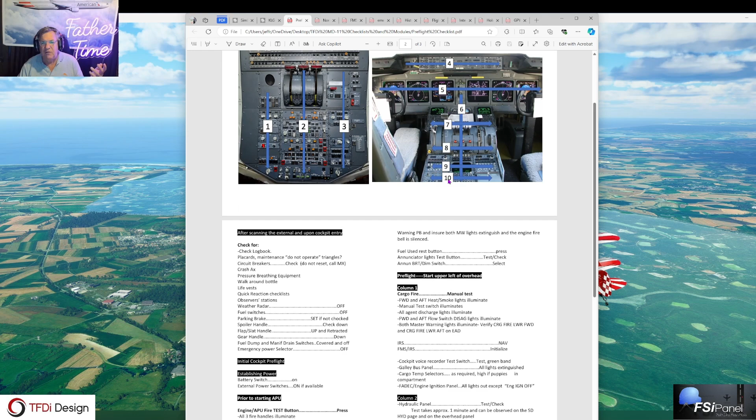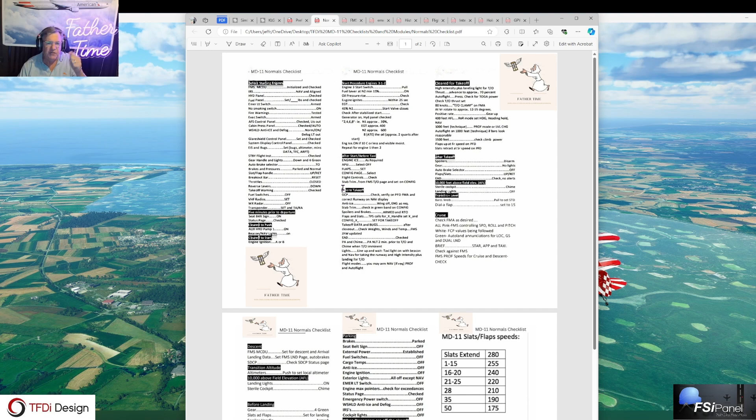I flew this back in 1992 to 97 with American Airlines as a co-pilot. And then this is a checklist normal. They're all printable and foldable, just like the old-fashioned. You could print this on cardboard stock if you want, or just regular stock, staple them back to back, fold them, and you've got yourself a real live checklist.

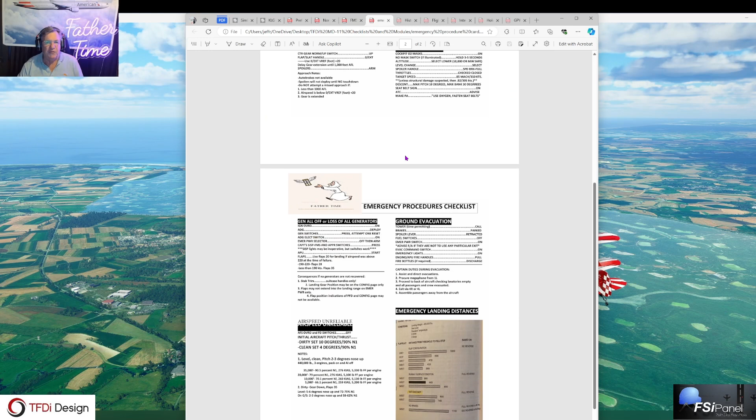Anything you see me do with the FMS is in here. I made up an FMS checklist, some real good stuff in there. Emergency procedures checklist, if you want to play around chopping engines and doing things, you can. This will get you up to the expanded checklist, which we don't have yet, but those are coming by the end of the year. But right now you can use this.

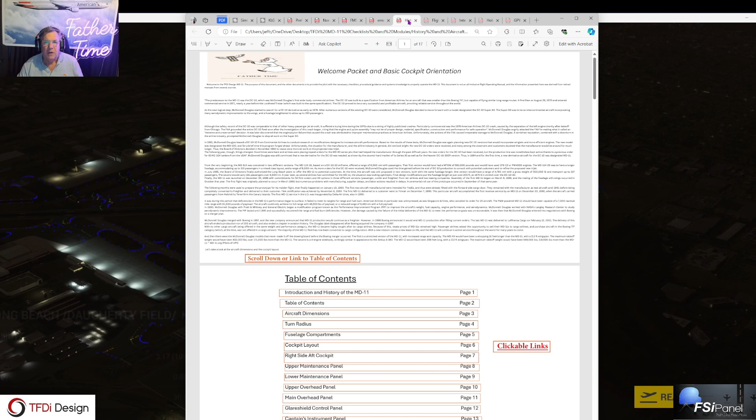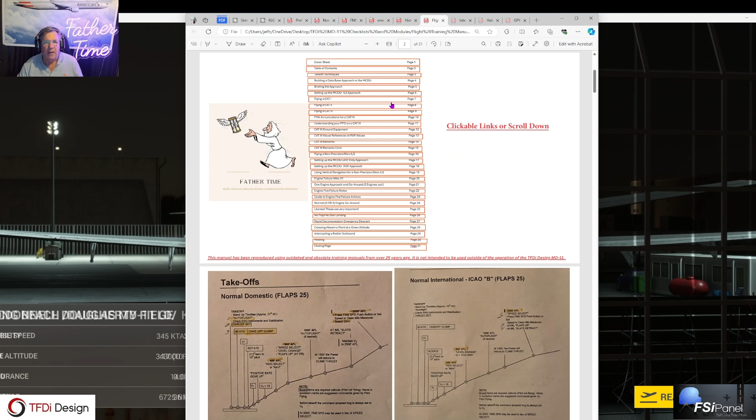Here's the history of the airplane. Click anywhere in the table of contents. You can see dimensions, do anything you want. Always go back to the table of contents right there. This is the flight training manual. So don't tell me you don't have anything to work with. One engine approach and go around right here. All sorts of information there.

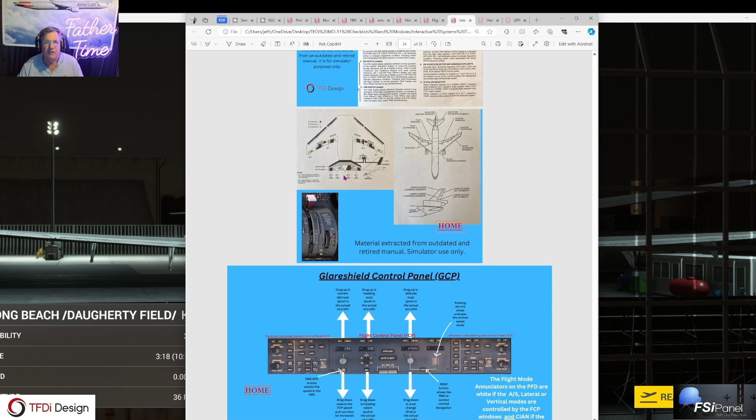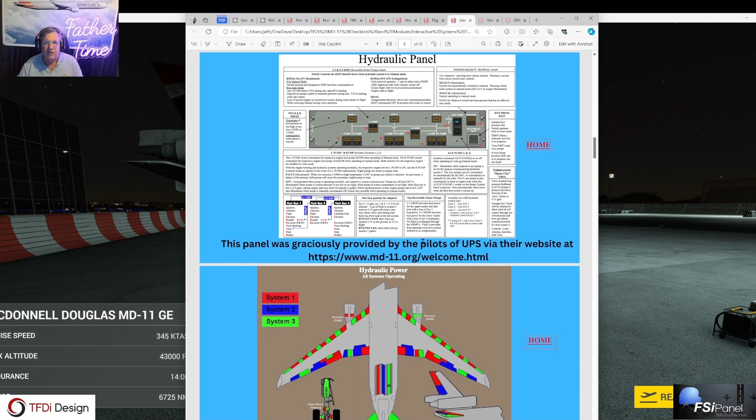Interactive systems guide, I made this up. I made up a lot of these panels myself, but some of them are also from, let's go, engine hydraulic panel there. Hydraulic panel from the UPS pilots via their website right here. It's an inactive site, but it's still accurate in terms of it's now it's there. That's interactive systems panel, real cool.

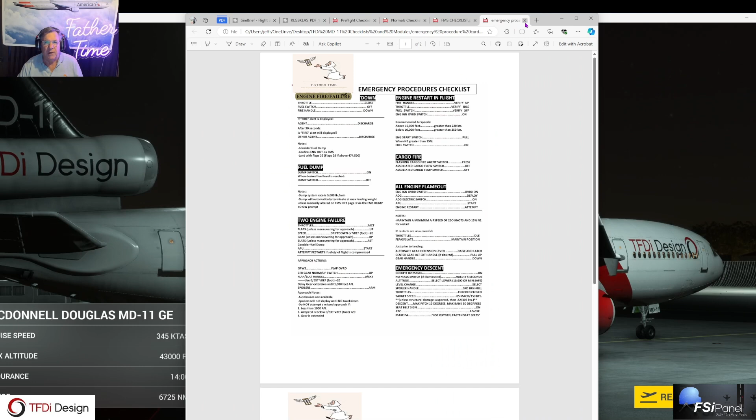Here's some holding information on the MD-11, what everything means, and lastly the GPWS test mode, what they meant. Fabio Almeida, one of the developers, made that up. But we're not going to need that one. We're not going to need holding. We're not going to need the systems. We're not going to need flight training or history. And I hope we don't need emergency. I'll leave the FMS checklist and the normals.

We'll start with the pre-flight. Our flight today, here it is, Long Beach. We're going to take a look at the facility to Las Vegas. And we got the PDF all set to go too. What could go wrong? Here it is, beautiful TFDi paint job. They asked me to fly this on part of the test program today. They saw a little bit of pink around the APU, and this thing just keeps getting better and better, guys. Honestly does. Beautiful. Anyway, let's go.

Big fan. I realized I haven't done, I'm going to make this daylight here. I thought I did, but I guess I didn't. What I realized is I think I went to live weather in there.

I haven't done a delivery flight yet. I used to do a lot of it when we were in the beta testing mode. Let me show you around here. It's really cool, very, very cool indeed. Let me go out here.

Freaky D, who's also one of our quality assurance guys and a Boeing engineer, has created the McDonnell Douglas delivery ramp from vintage 1994. Remember, Boeing bought McDonnell Douglas, so even though it's the MD-11, he's a Boeing guy and it's near and dear to his heart, so he created this. He's got like 140 scenery packs. It's his hobby, does them all for free over on flightsim.to.

Here it is, the McDonnell Douglas delivery facility. I just realized I hadn't done one of these since the developers were doing the development of the aircraft. Look at that, McDonnell Douglas fly DC jets. Freaky tells me this is the paint shop, you can tell by the ventilation system. Here's some unpainted MD-11, unpainted MD-82.

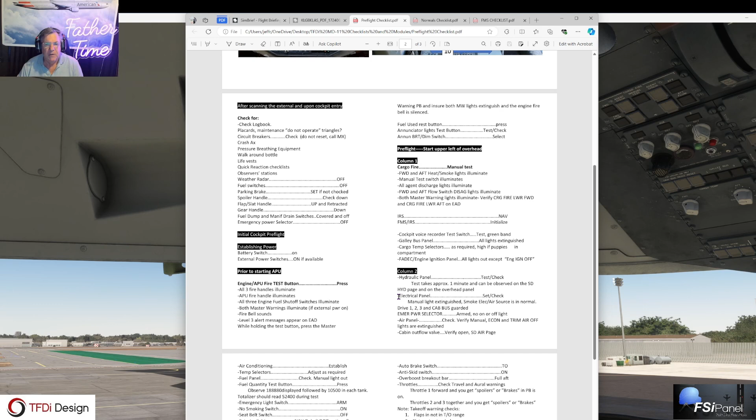Again, I remember that's the pre-flight checklist we're doing right here. Remember this, I'm going to be following this flow. So all this that we're talking about is all in here, so you don't need to memorize anything. I did it for you.

And here's the pressure breathing equipment. Put the hood on, fight the fire with a Halon fire extinguisher. Make sure the moisture seal's not broken. These spare pins in case you get stuck out. It's the ELT, which the captain would grab on his way out in the event of a water ditching, God forbid. And of course the door, shut it if you want.

Not going to load any people on board here. That's the quiet cabin since it is a delivery flight. All right, let's go inside.

Pretty cool, so we're going to get it started. We check the logbook, make sure that we don't touch any flight controls. We've already done the outside, noted whatever's out there, looking around to make sure there's no placards or maintenance issues.

That tells us we should not be touching any of this stuff. Then we come in here on the center. We make sure the radar is off because we're about to power it up. Fuel control cutoff switches are cut off. Start switches are in, throttles right, spoiler levers, reverser levers down, spoiler handles down, flap levers up, gear handles down.

Go to the overhead, and we make sure that the wipers are off because we are supposed to put power on. And we make sure that the fuel dump switch, fuel manifold covers are down. And we see the external power is on, which means it's 400 hertz, 115 volts.

It's good. First we turn on the battery, and this is called the initial power up. Once we do that, turn on the nav lights, make sure everyone outside knows we're doing that. We turn on the IRSs.

Let's go to the electronic flight bag and get a few things done here. And that's not very bright, is it? Let me go here. Wow, why are you so dark? Okay, let's do this, sorry guys, trying to get this figured out.

My SimBrief username is in there, Hoppie code if you're going to go VATSIM or IVAO. Pause at the top of descent is available, we're not going to be doing that today, that's for a super long haul. It'll pause at the top of descent when you wake up in the morning and finish the flight.

It's got a MANPADS defense system, we're not going to operate that. I've got a realistic IRS mode, automatic seatbelt behavior. This is what I have done: I have Imperial, and I'm going to use pounds, top of descent systems, tape displays, and I want round dials.

All right, let's go to dispatch, import flight plan, Long Beach to Las Vegas. What's down here? I hit this, send flight plan. It's in there. Set payload, it's in there. View departure charts, you can sign in if you want on Navigraph.

Pretty simple. This doesn't do you any good to copy this because it changes every flight, plus it sends me a message on my phone that one of you guys tried to get in there. So I'm just going to use my phone to sign in. It's going to ask me if it's TFDi, you could go to the website and do it of course. And there it is, yes, here we go, TFDi would like access, sure TFDi, come on board, love you guys. All right, so now we're signed in here.

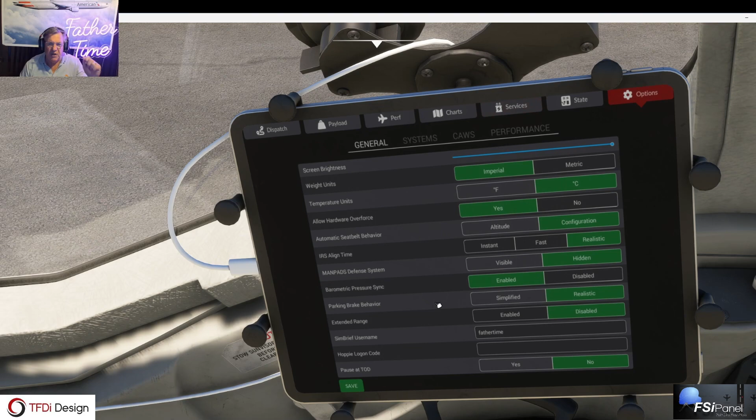If you want to disable that feature and go with simple alignment, you have to go down here, parking brake behavior, go simplified, then you can just hit your switch in the cockpit. Otherwise, you'll have to depress pedals and hold it and pull it back.

To release it, just depress the pedals. So to set it, depress the pedals, pull back the handle, or to release it, just press the pedals. But if you go simplified behavior, you can just use one switch, play with the lever. That's a relatively new feature.

All right, back to the overhead. Oh, we never started the APU. That a boy, Jeff. Let's start the APU here, since I just killed the external while the IRSs were aligning. Very nicely played, Captain. And what I should have done also is align the IRSs.

We'll go down the box, and when that comes up, we'll get that going. Let the APU start. Let's go outside. That's new.

APU exhaust. Supposed to be testing that. I'm also supposed to look for any kind of issue on this one, a little bit of pink around the outlet. No, I don't see it.

You guys see anything? Leave it in the comments. I don't really see any issues. On this build, they're looking to see if there's any kind of fragmentation on the livery, and I don't see anything. Looks pretty good to me.

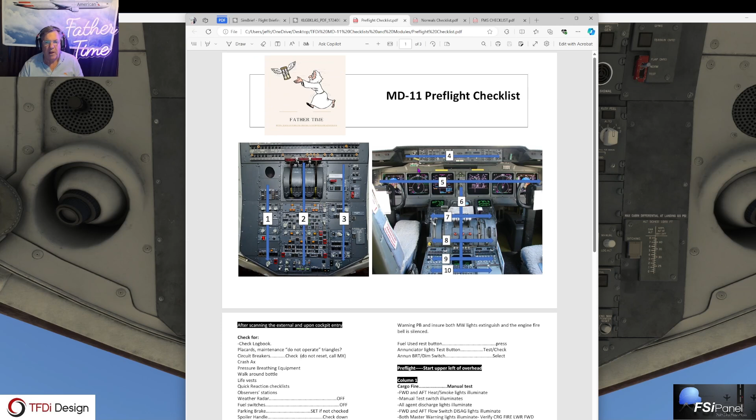All right, so back to the overhead. And remember, we're going to be using this procedure right here, this flow, 3 columns across, and then wiggle our way down the center console, getting all these. It's a memory item.

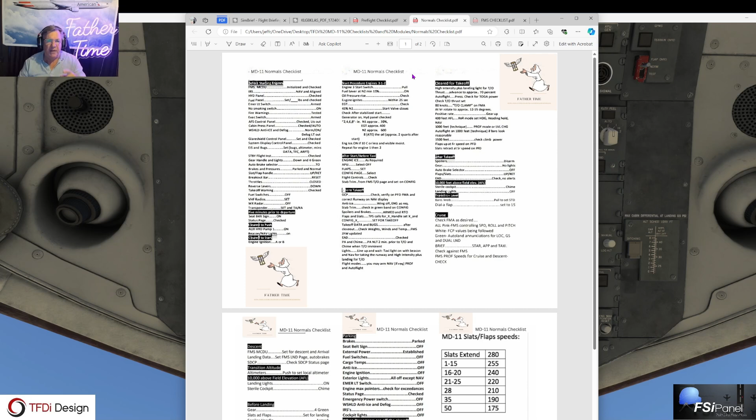This is the one, the normal procedure, the printable, foldable one. You'd run this together to make sure the other guy got everything on the pre-flight. So one guy did the walk around, another guy came in and did the overhead, and the other guy loads the box. So here we go.

All the way up top. Handles are up in the normal position. If you want to pull a fire handle, pull them down and twist them. I'm going to do needle in the green band. Generator, no lights on here.

Galley buses, sometimes they trip when you have just single source APU, or usually the external power has a phase issue, APU is usually fine. FADECs, like EEC, no lights on there. That controls power settings so you don't overboost.

Ignition A or B will use for START. Override is both igniters, you'd use if maybe a dual engine flameout. There's actually a procedure, if it doesn't start in A, you can start it with both igniters. You just got to write it up when you get back.

Here's the hydraulic panel. We're going to come back to this column now. You start the test. If you really wanted to watch it, you can go down to the system display control panel here, and you could watch the hydraulics go through its tests. You'll see things get pressurized, turned on and off, but if there's any problem, it's going to come in and tell you.

You know, while I'm saying it, see these 6 identical CRTs? I'm going to come way down, they just aren't bright enough for me, and I'm going to turn them all up. I have to go way down here because with the engines not running, these things aren't really accessible in the simulator type environment with the mouse.

You end up turning fuel switches on and off, so I do those lights, I do this one here, plus the floods, flood, panel, flood, panel, and that's how I start it. All right, let's go back up top.

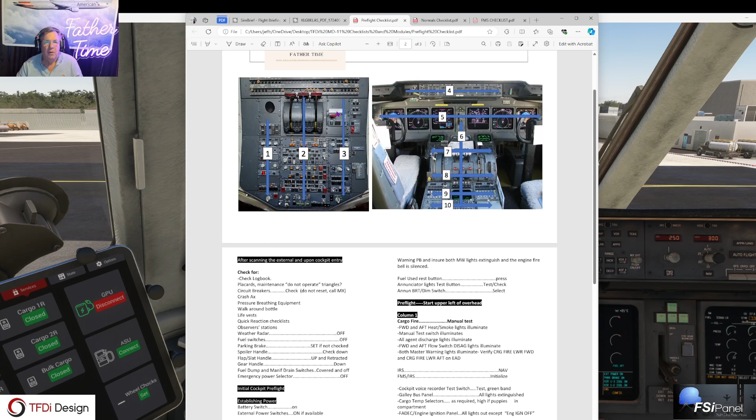Okay, so if you remember, we did all here. This is the overhead. We came across the glare shield control panel. Now we're going to come across the CRTs and right down the middle, checking it out before we get going. Guys, this will be timestamped, so if you want to jump ahead, go ahead, knock yourself out. I wanted to show you a delivery flight, though. I just think this is so cool that TFDi did this. I get pretty excited about this stuff.

All right, so you can set this PFD up. There's the altimeter, 2993. What is our ATIS here? I'm going, let's see, Long Beach weather.

ATIS not available. I think I'm just going to go over to METAR - calm winds, I can go to 30, guys. Clear, 21, 17, 2993. All looks good, and I'm sure the weather over at Vegas is just fine.

They are landing 26 to the west. Good visibility, of course, 2995, so similar out there. Weather. Let's take a look at the departure.

We're filed on the, this is Long Beach, SID. We are filed on the Zoom departure. Let's make that here. You can see the Zoom departure. Let me just go here so I can do my little handy dandy. Here it is, 10-3, Zoom 3 departure. RNAV, GP, yeah, we can do all this. Let's go, yeah, whatever, and then here we go, runway 30.

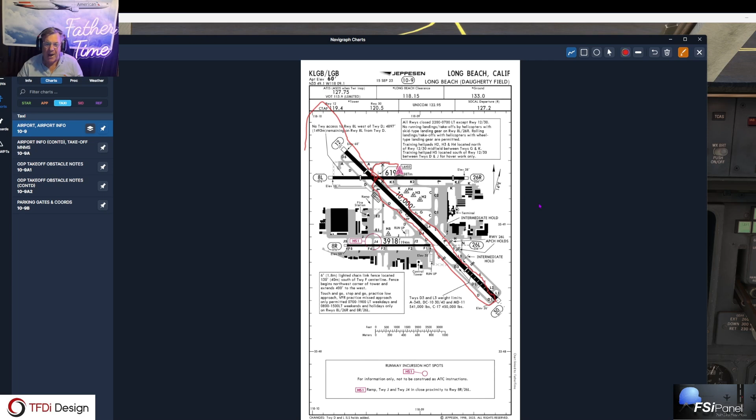We can do that in nav if it's in the box, which we'll take a look at in a second. Anyway, thought I'd do that while we were here. You can set your return engine out, or your engine out, at 800 feet. We're not going to bother doing that today.

No unwanted messages, we talked about all these. Gear handle is down, center gear.

The only reason you'd ever override the center gear that I can think of is if you're very lightweight and at an outstation and needed a tire. You'd say, let's go out, take off one of the center gear tires, raise that thing, and move that tire over here. That'd be quite a process. That's the only reason I can think you'd need it procedurally, maybe if you had a blown center gear tire and you were lightweight. You could do it, but we never did it. This is quite the tight taxi out here, isn't it?

Yeah, very interesting. I can do it though, I know it.

So, throttle quadrant. All right, gonna come up here. We'll do the FMC in a minute. I know you guys probably want to do that first, but remember, one guy does the outside and the overhead, the other guy usually loads the box. So I'm going to put this to TO.

Anti-skid light is out. Aux pump, you can turn on the aux pump for pushback either here, which is what we normally did, or all the way up on the hydraulic panel up here. You can see the hydraulic panel test.

I got to test this, guys. I'm going to take off the external. I really need to figure out what's going on, why that APU failed. If it fails again, I'll have to do this video over. Something's going on there, or maybe I did something wrong, which is normally the case, right?

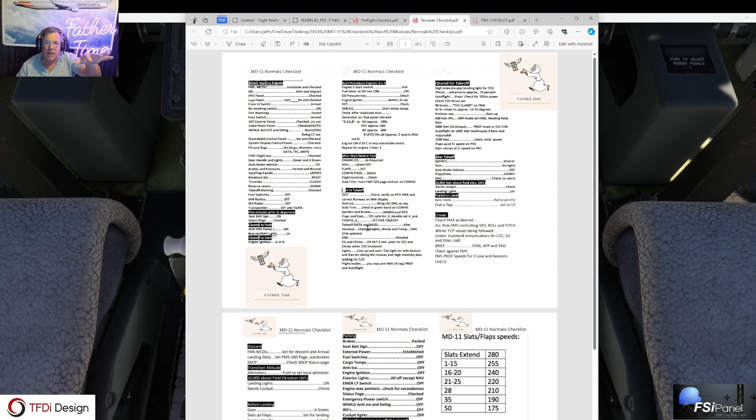Everything for the start, the whole thing we're about to show you is going to be normal procedures. Everything I do is here, it's all here. So everything I say is all written on these two checklists, pre-flight and normals.

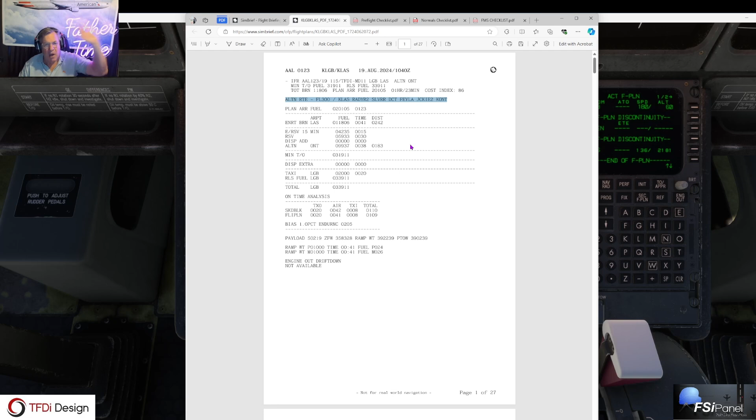If you put an actual alternate in, it'll compute a fuel for you direct, and that's really not how you go there, because a lot of times you have an alternate routing. Here's the alternate routing, and it can be kind of circuitous. So the company will put in an actual routing you can expect should you divert, and sometimes it takes you a long time to get there. Like even going from Kennedy to Newark on a short, they send you out way west towards Pittsburgh. So you want to put in the fuel that historically the company knows you will use.

Let's see, planned fuel, zero fuel weight.

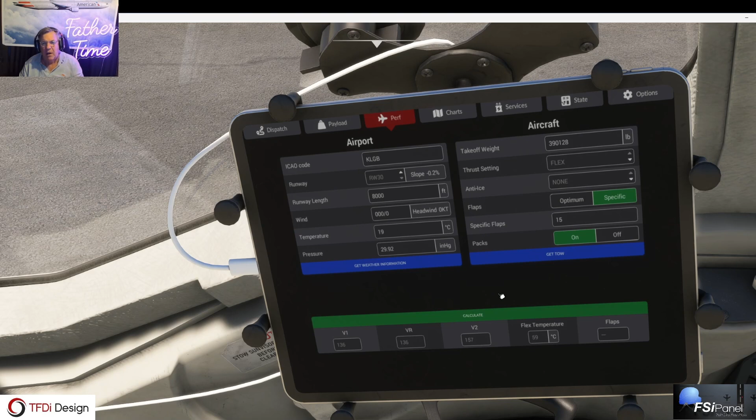Flaps, we're going to go specific, I'm just going to put in 15. Keep it simple. MD-11, they assume packs off. They assume packs off, so you got to put packs on if you want it. You calculate it. So if you put packs off, as you bring the throttles up, packs trip off, and as you level off or clean up, packs come back on automatically. Kind of cool. There you go.

36, 36, 57, 59. Packs on, flaps 15. And I'm just going to put 0 on the slope.

And 21 Celsius, so I put 21C. And it says a European type climb here, I'm going to put in 1560, and then we're going to talk about how this thing works. 1560, 36, 36, 57, just as the electronic flight bag calculator came up with.

There we go. This guy's on legs, and this guy is on takeoff data, and I just checked to make sure that they're magenta, which means they're active. So the way that it's going to work, we're going to take off in nav arm, we're going to take off in profile arm, and we're going to arm the auto flight prior to takeoff.

The TOGA on this aircraft, of course, there's your TOGA switch, or here's a TOGA switch, but the way you do it for takeoff, this little screw, by the way, is a TOGA for go-arounds. Think of these as go-around switches. TOGA, you arm the auto flight, this box will disappear, and then when you go above 70, TOGA engages for takeoff. A lot of confusion on that.

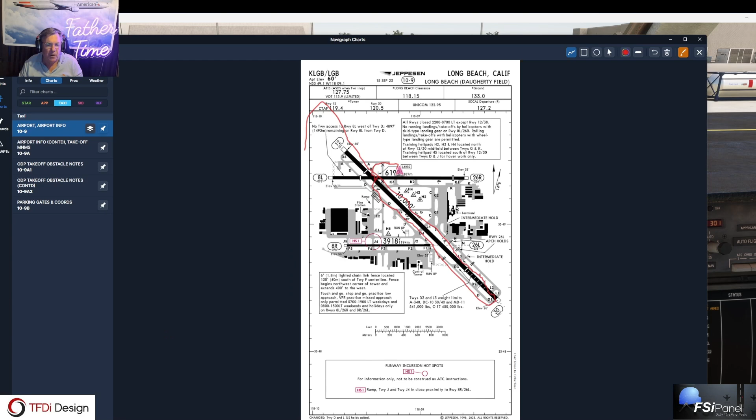That's how that works. So what I meant to set is the actual runway heading, which is 301. Oh, and I didn't check the departure altitude, it's been a while since I flew this one. Zoom is, it was 17,000. There you go, right there. I usually will circle that. And that's our departure.

We go through the box together, we already talked about the database. Go to the flight plan, we'd walk through, we check the nav routing and then the legs. We can go to plan to step through, we make sure there's no discontinuities over here. So you can go to plan, and with that you can step through, which won't happen in map.

Look for any discontinuities. One guy reads the flight plan, and the other guy, one guy loads the box and checks here, and the other guy will follow along in the flight plan. Go back to map. Okay, we're good, we're good, everything's great. Let's run the checklist.

Then we've already called for clearance, we've got our clearance, we'll say that we got our squawk. Kind of a funky thing on the squawk, guys.

You set the squawk, let's see, it's 3245. This is the first flight I've done that is in FSiPanel, which has ATC, so this is fun. It's a delivery flight.

There's no FSiPanel profile here. I could do VATSIM, terrible for instruction, great for content. Turn on the transponder - if ATC is not picking up your transponder, you probably forgot that switch. So it's kind of a 3-step process: enter the code, turn on the transponder, and go to TA/RA.

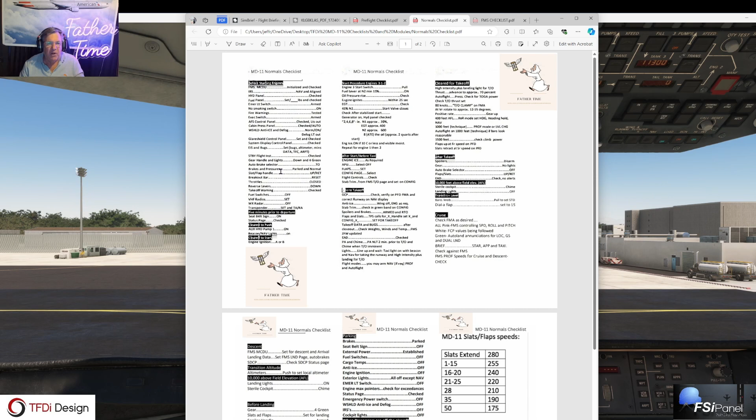Standby flight instruments are checked. Gear handle and lights down and 4 green. Auto brake selector is on TO. Brakes and pressures parked in normal. Slat flaps up retracted. Breakout bar - this is overboost breakout bar. I didn't talk to you about that.

It's right there. If you lost 2 engines, you would slam it past there and get everything that engine had to offer, at the risk of overboosting it and burning it out. But you're going to crash if you don't do it, and you'd start dumping fuel just by pushing that switch right there. So that'd be if you were really desperate, it wasn't flying - that's what you would use that for.

Overboost breakout bar reset, and then throttles are closed, reverse levers are down. Takeoff warning, we tested. Fuel switches are off. VHF radios, we talked about setting them. Weather radar is off and tested. Transponder is set and TA/RA, we talked about that. And then seatbelt sign is on. Status page we checked, remember we just had ignition.

And then cleared to push would be the pump, beacon, and ignition is clear to start. So we click request taxi, and we'll say it's ready to go. Let's do this. And really, we don't need to even use GSX, guys, right? We don't even need them. So let's just say we're clear to start right here.

So let's go to the overhead, because we're taxiing straight out. That's a new one, huh? Here, and we come down and turn on the aux pump here, and we're going to start. We're not using GSX today. Very cool indeed, and here we go.

We're going to start 3, 1, then 2. A lot of times in the real airplane, we taxi it on 1 and 3. What I want to show you here, remember that was at 32. These other two are 32. You need at least 25 to turn it, then you need at least 15 over here, and you also need to oil pressurize.

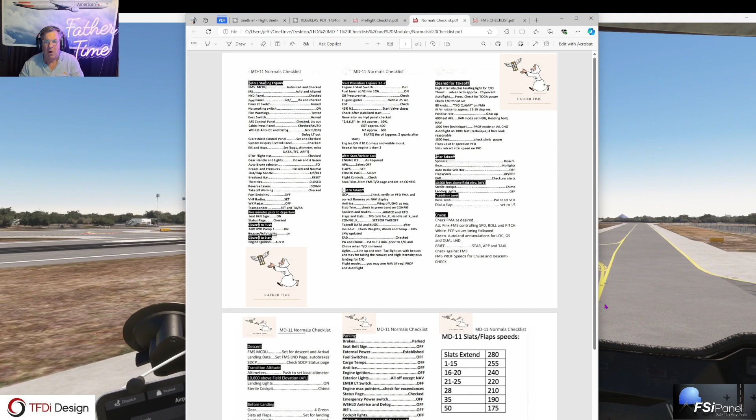Now, would you feel safe going pre-flight? American wanted you to go to auto flight arm when you're on the runway, then bring the throttle up. The reason is we've had aircraft accidentally go over 70% on an outboard engine and activate TOGA, ending up flying off the end of the runway - an Airbus specifically in St. Thomas. So they went to this policy where we arm our auto throttles when we're actually on the runway.

TFDi 123 - how about American 123? TFDi clears, line up and wait. If we had anybody on board, we'd cycle the no smoking sign - takeoff's imminent, we did the prepare for takeoff. Final's clear, we double check the runway, 30, clear left, clear right. Captain will look all the way around. Gonna square the turn off so we don't put the main gear off the runway, off the taxiway.

Bring it on. Your nose gear, I've said it a million times, is right there under the speed tape - same thing on the Boeing 777, 737. Airbus, I think it's over here. And on the 72, it's over here. But on the MD-11 and this generation Boeing, they're here. Like I said, on the A320 I noticed it was over here.

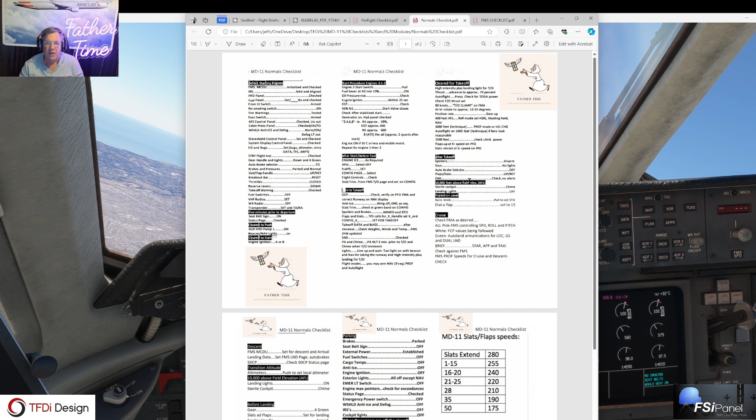And turns and makes sure the auto brakes are out of TO. He also checks the status page for any messages - clean machine. All right, man this thing flies nice. Wasn't always like that as it was being developed, but it sure does fly nice now. So let's go down here, turn to TO, spoilers are down, after takeoff climb checks complete. After takeoff: spoilers, gear, flap, auto brake selectors, EAD. With EAD, all you're looking for is any unwanted messages here or there.

That's it, we're doing a 180 heading. Vegas is actually behind us now. This is to get us out of the way of LA's airspace - LA is right there, 8 miles away, so it's a big turn. They have you climb up well above their airspace before they let you turn. That's why it's 17,000 feet, because they really need to get you up there out of Long Beach.

Long Beach. The Queen Mary is down there, it's a static display now - I think it's a hotel. At least it was. All right, looks like it's pushing over.

Out of 10, there we go. We can come up to the overhead, and we can de-sterilize, turn our lights off. All that's on the checklist, guys. Everything we're doing is right there for you.

All right, now let's do a left-hand turn. Before I turn, I go to heading select. We'll do a left-hand turn, and he turns us around. Turn left. The reason I do heading select first is they're going to tell us to turn left direct to a point, and I want to make sure it goes left and not right.

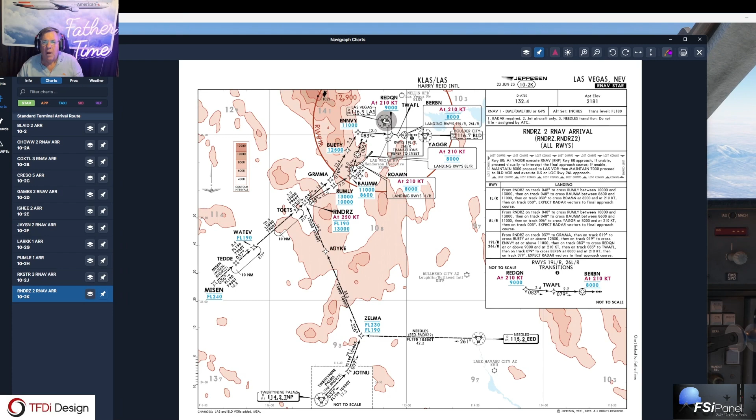All right, so let's go and start getting ready for the arrival. We'll talk a little about it here - this is kind of complex. And you definitely want, it's the RNDRZ - RNDRZ. I'm going to bring this over here, guys, right over here, make sure you can all see it.

First point is MISEN at 24, whatever above 19 - we'll get the other one in a minute. WATEV above 19, RNDRZ at 250 between 19 and 13 altitude. RNDRZ 280 at 13 - but RNDRZ should be 250 at 13. So I go here, and the speed instead of being 280 should be 250.

Right there, now we go back to the flight plan. So now we can go MISEN - I'm going to put at 24, which we already are there. WATEV above 19, then RNDRZ, it says 280 at 13. It's 250 at RNDRZ, right? I don't know where the 280 is coming from.

Then RUMLY - no, GRMMA, BUETY, above 12.5, ENNVY above 11, and then a downwind. BERBN at 210 and 8. BERBN at 210 and 8. REDQN at 9, BERBN at 210 and 8. So let's go 210 and 8.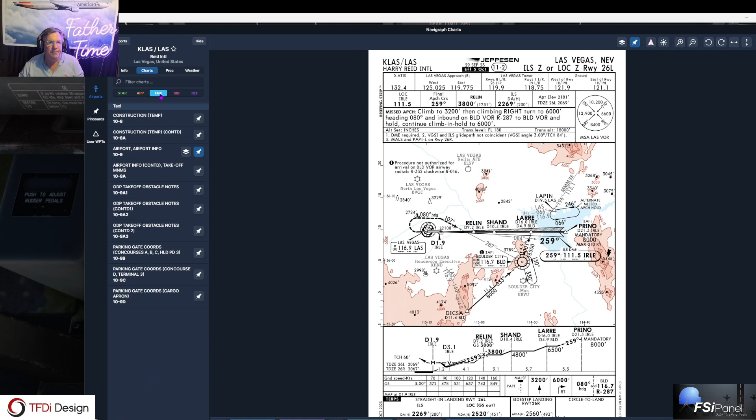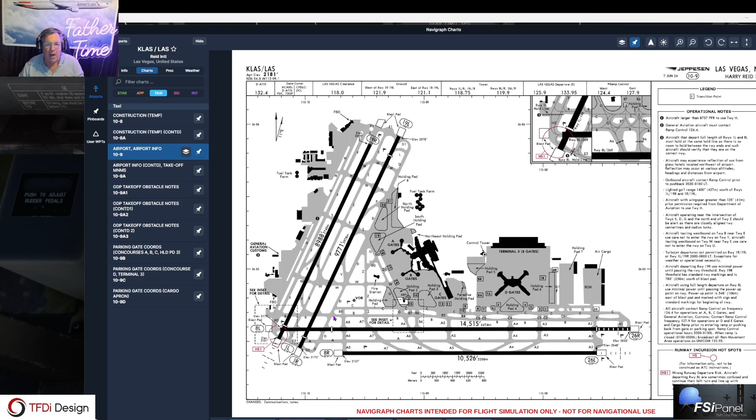Let's go taxi and airport. Where shall we park? I don't know. We're on 26 left. Right here, so we've got a hot spot. We'll probably get off at Alpha 6 this lightweight, hold short, right? And then we'll bring it on in here and find a gate.

Delivery area, we'll say it's going to come, and we're going to pick up all these execs for American Airlines that are going to take this airplane down to Dallas. We'll find a parking spot somewhere over here. I'm sure it'll say that parking is too small for your aircraft, but we're not going to worry about any of that. Might not even use GSX.

All right, guys, that's it. Everything's briefed. Back in here. Back in here. And good.

Easy for me to do, huh? You don't push, you don't pull, you don't do nothing. Just leave 8 in there. That's what you asked for, and that's what you get. So I always check it, say that's what you asked for, but this is what you have, 8,000.

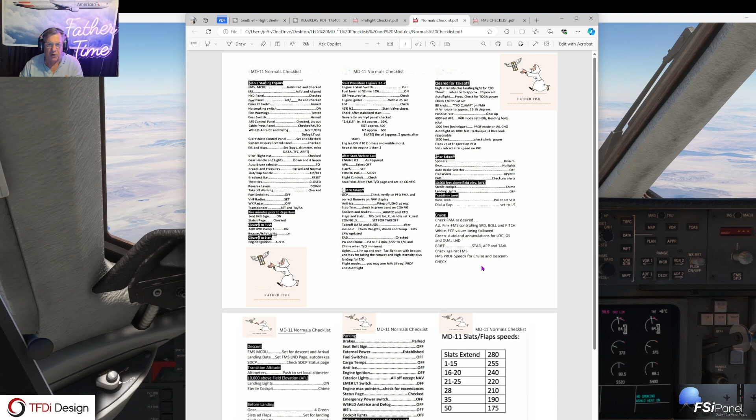Check, so that's something we didn't do. There it is, descends here, but it's not going to really matter, is it? There's so much going on with airspeed changes. I love this during the development phase because it really helped me test the profile mode because it had airspeed, altitude changes all over the place.

I mentioned the APU flame out and how that affected us. One time we were taxiing out on all 3 engines going to Santo Domingo on the inauguration flight. It was 1995, American Flight 790. Look it up. American Flight 790, 1995, JFK to Santo Domingo. And we had a ground evacuation. Flight 790, 1995, JFK to Santo Domingo ground evacuation. You'll see a New York Times article in there on that.

But I'll tell you what really happened. We taxied out at Kennedy, made a left on Bravo, and coming out of the gate, taxiing out, our number 2 engine, somewhere in there when we brought it back to idle, flamed out.

We didn't know it, but a Gulf Air airplane was being taxied by maintenance guys behind us, and they saw flames coming out of the engine. We had no indication it was a tailpipe fire. We hadn't even noticed at this point that it had flamed out. When he said it, we looked and saw the number 2 engine was off, and Gulf Air said, yeah, it's going right up your tail.

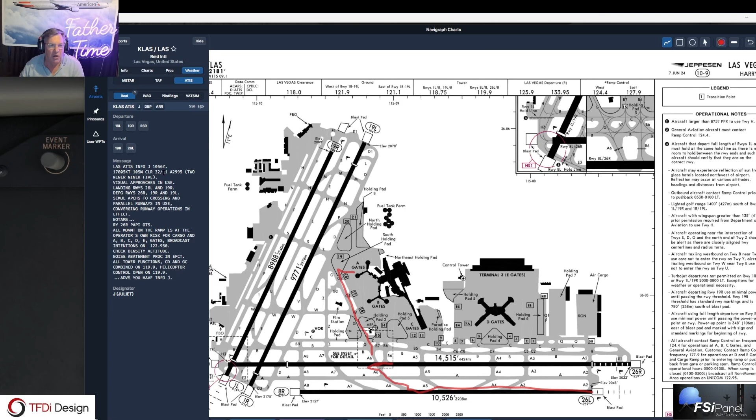ATIS is 170 at 8, runway 26 left, so it's a direct cross, 5 knots, 2995. When we get out of 18, there we go, 2995 set. And it's doing the VTI, applying a beautiful approach here.

Yeah, the MD-11 is not an intuitively easy plane to fly, especially if you've been flying the Airbus. Of course there's some similarities to the Airbus, especially the box versus Boeing's. The box is very similar to the Airbus or the Airbus A300, A600, 310. But this push-pull stuff, you know, the flight control panel, if you push, you get what's in the window, or hold. So you push on the altitude, which is that little arrow up, you get your altitude hold. You push here, you get heading hold. Push here, you get airspeed hold. You pull here, you get speed select. You pull on here, you get flight level change. And you pull on here, you get heading select. So a little bit different than other aircraft on the push-pull.

Also, you got to use your mouse wheel to spin things here. I didn't mean to do that.

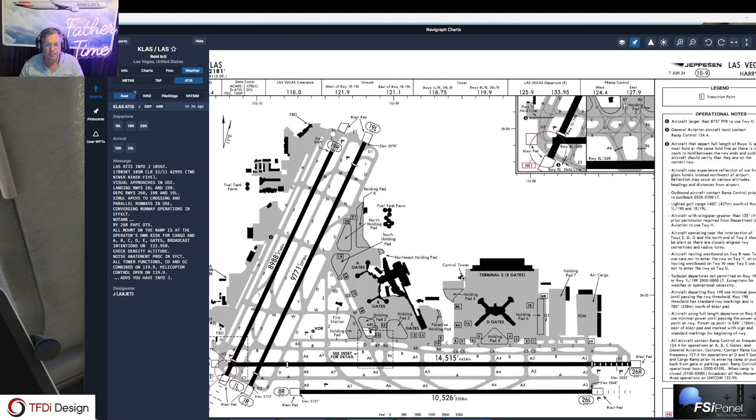So if they did turn us, we would have to get down, slow down. I'd probably get dirty, get slow, and get down to a crossing altitude of 3,800 at the FAF, if you remember, for the visual. Yeah, 3,800, which with an elevation of 21, that's really only 1,600 feet above the ground.

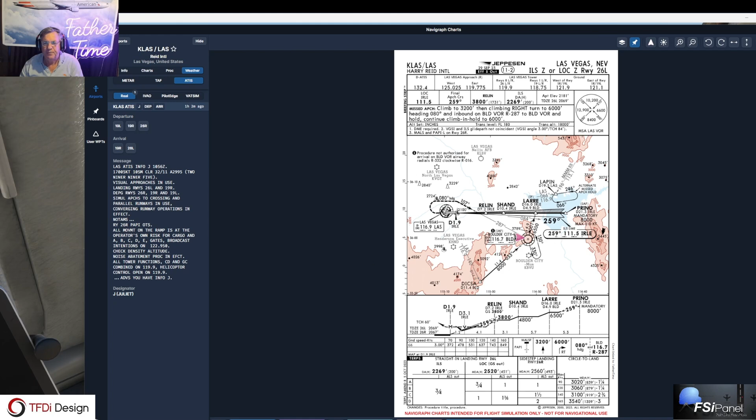This PRINO, we have programmed that. I'm leaving it in nav because it's just basically flying a heading out here. Now I can actually come up here, get my heading synced up, right there. Now we're in heading hold. And I'm going to get to 6,500 feet over LARRE, so I'm going to put in 6,500 over here. Altitude.

And there's LARRE right there. I'll get that armed. And I'll get the heading base turn armed. I haven't gone select yet. I wonder if my little handy dandy works. What am I doing, right? Yeah.

I'll get us on a turn. And the reason, guys, this is a tight little turn - it's only 4 miles. So to make this turn, they slow you down. Otherwise, you won't ever make that turn.

All right, so I'm going to go heading select, speed select, put out flaps 15, and altitude down to 6,500. So I'll go 180, and hopefully it can make this turn. You can see that it's tight up here, especially with this high ground speed, and this turn is not going really very fast.

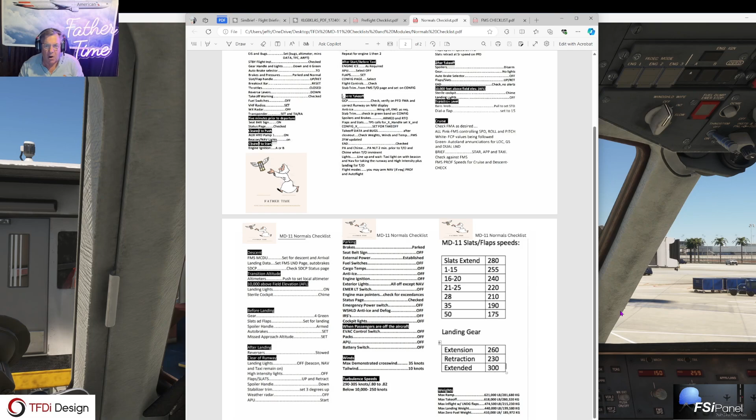Clear the runway, weather radar off. I didn't do that. Weather radar off. And the APU started, brakes, seatbelt sign, external power, fuel switches off, cargo temps are off, anti-ice. I didn't shut that off, let me do that. Windshield anti-ice there, like that.

I think the evac switch they have, turn that off. And we turn the emergency lights off when everyone gets off. And we turn down cockpit lighting, spin it all down.

The last thing we do is we down the throttle quadrant, make ourselves small, we turn our CRTs off, save on the wear and tear on those.

The boarding starting, I think we have it. So yeah, really good flight. The airplane did great. We talked ad nauseum here about my transition to land here, not proud of it. Engine ignition is, engine ignition off.

I don't think I did that. It's off. And thank God for checklists, huh guys? Emergency power switch, anti-defog, IRS is off, cockpit lights are off, engine max pointers, you check for exceedances.